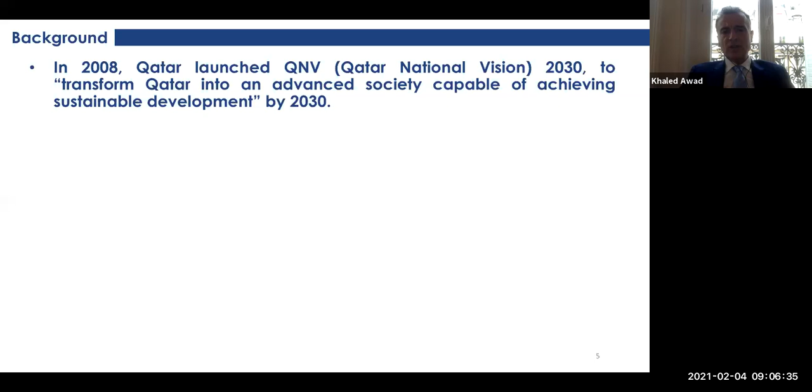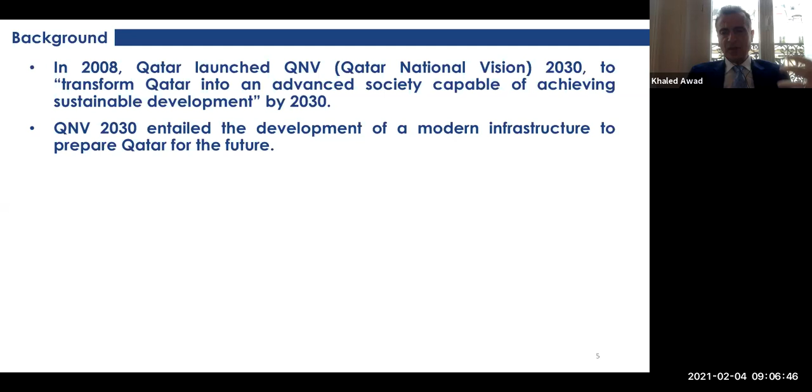So just some background. In 2008, Qatar launched Qatar National Vision 2030. The aim was to transform Qatar into an advanced society capable of achieving sustainable development by 2030. The whole idea was to make Qatar something modern, and to do that they had 4 pillars: human development, social development, economic development, and environmental development.

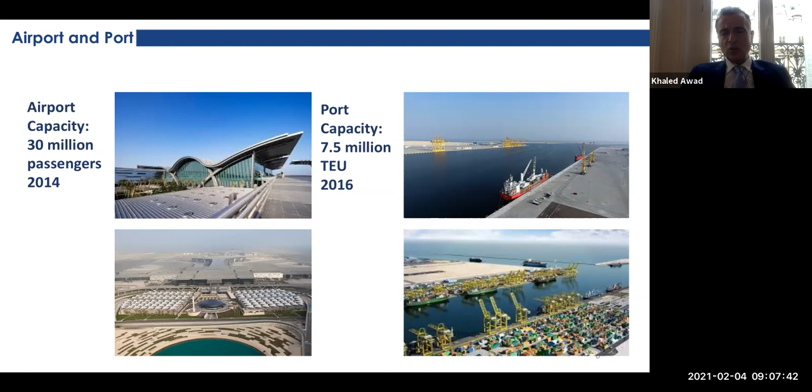One important part of the discussion today is how the infrastructure component came into the vision. For example, they had an airport that barely had 5 million passengers in 2008. In 2014, they completed the first phase, and the airport now can accommodate 30 million passengers. They had a port capacity of less than 1 million 20-foot container equivalent units, the TEU, and in 2016 their port was expanded to 7.5 million TEU. Now they plan to make the airport 50 million passengers by 2030, and the port 12 million TEU by 2030. So we'll be talking today about the stadiums, but there are so many other developments that went through in Qatar.

The Lusail city is a completely new city north of the capital of Qatar, which is Doha, around 25 kilometers from Doha. It was supposed to accommodate 450,000 people in the next 10 years.

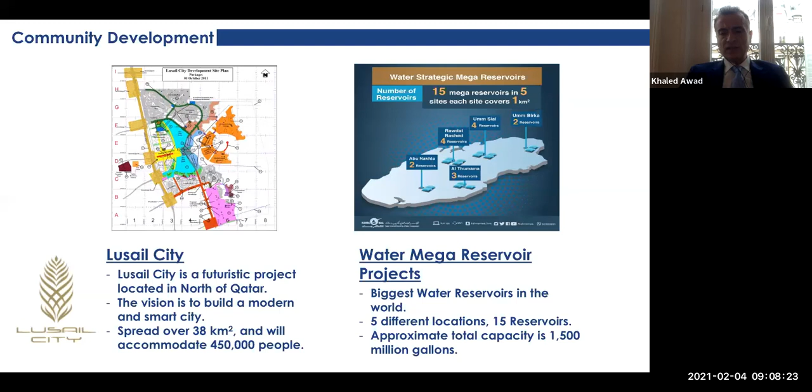Another project was a mega reservoir project with 5 different locations and 15 reservoirs. Qatar doesn't have water, so they desalinate all of it. On top of that, they wanted to make sure they have water security facilities, which is why they developed the water mega reservoir projects, which I'll talk about later in the presentation.

Another component was the metro, consisting of 3 lines—the gold, green, and red lines—with 40 stations and 2 major stations in the whole country, spanning around 76 kilometers of metro lines. Another transportation project is the tram lines, the Lusail light rail transit line, with 37 stations and around 33.1 kilometers of lines.

Part of the infrastructure is, of course, the road network. They had the Sabah Al Ahmad corridor, which links the airport with the expressway. The expressway is a huge transportation road infrastructure in Qatar, one of the biggest infrastructure projects related to road construction in the world. One of its components is the Sabah Al Ahmad corridor, which consists of 37 kilometers of roadworks.

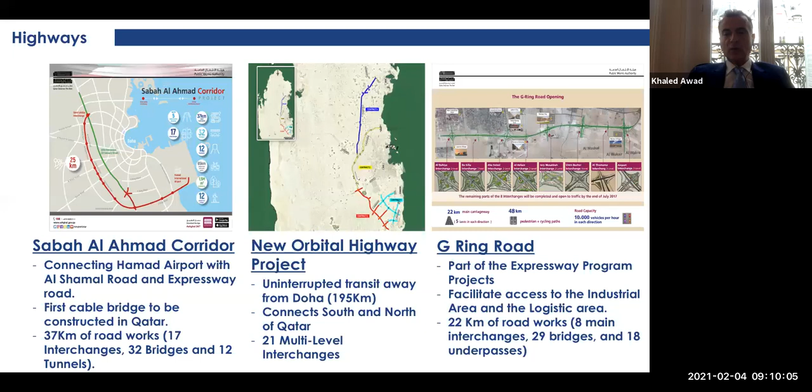The G Ring Road, a ring road, is also part of the expressway program, and it gives access to the industrial area and the logistics area. It has 22 kilometers of roadwork. All these infrastructure projects were undertaken in Qatar as part of the Qatar National Vision 2030, which was established in 2008.

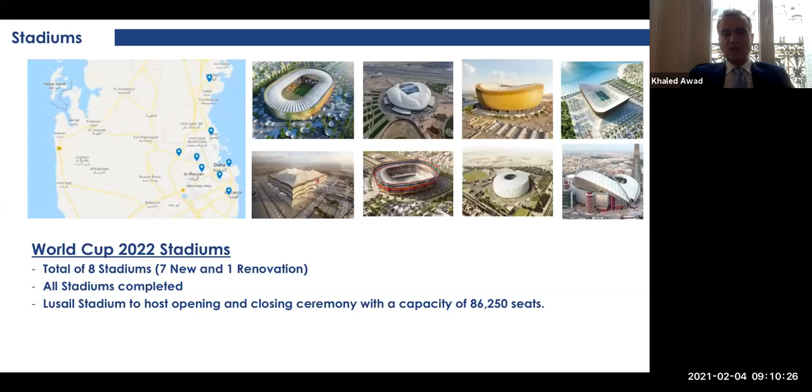Let's talk about the stadiums now. We'll be talking about 8 stadiums—7 totally new stadiums and 1 renovated, existing one. Initially, when Qatar won the bid to organize the Qatar 2022 FIFA World Cup, they bid for building 12 stadiums.

But then, when they found out the cost and time this would take, in 2014 they decided to reduce it to 8 stadiums, and FIFA accepted, based on the fact that the same infrastructure—accommodation and logistics—would be there to take care of all FIFA's requirements. So there was no change in the total investment Qatar would make; just the number of stadiums was reduced to 8.

The main reason Qatar won the bid in 2010 was that it promised to make these stadiums very sustainable with a very low carbon footprint, and most importantly, to give 170,000 seats from the stadiums, once the World Cup is over, to other countries in Africa. They even committed to demounting one entire stadium—one of the 8 will be completely demounted and taken to another country. I'll show which stadium that is when I talk about it.

So the total investment for the stadiums is around $10 billion, which includes the 8 stadiums and the adjacent infrastructure.

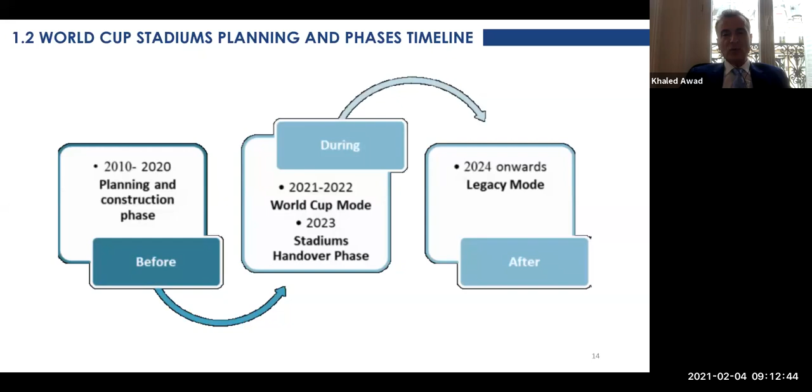Part of their bid was to show that there is a legacy mode, that these stadiums will not be deserted with nobody in them, because Qatar is a small country and there will be no way to fill these stadiums after the World Cup. So they had to show what the legacy mode would be after the stadiums are done.

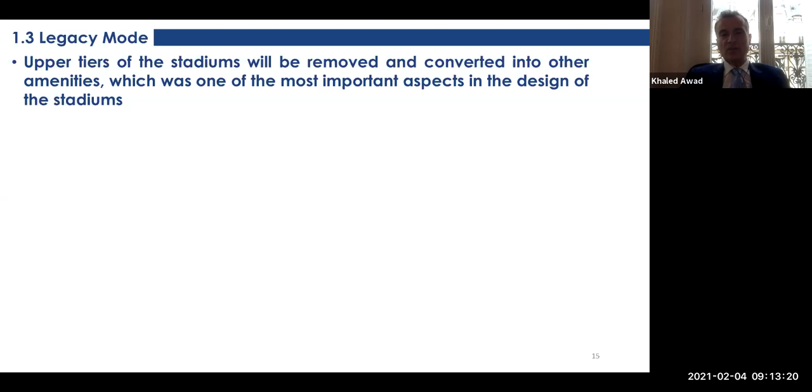Qatar said in their bid that in addition to gifting 170,000 seats, all the upper tiers of the stadiums will be built in a way that they could be removed and converted into other amenities. So once the World Cup is finished, you will see different uses of the facility at the top of the stadium - shops, malls, and cycling areas inside these stadiums. That was a very powerful bid component to FIFA.

That donation of seats, the sustainability component, and the fact that they will be renovating the top parts of the stadiums with new amenities helped Qatar win the bid. It also showed that even with reduced capacity - when they donate the seats and give out one of the stadiums - the remaining part will have such a nice atmosphere as has never been done before.

So you come to the stadium not just to watch a football game, but to do other things inside it as well. This is something totally new - a stadium becomes a visiting place whether there is a football game or not.

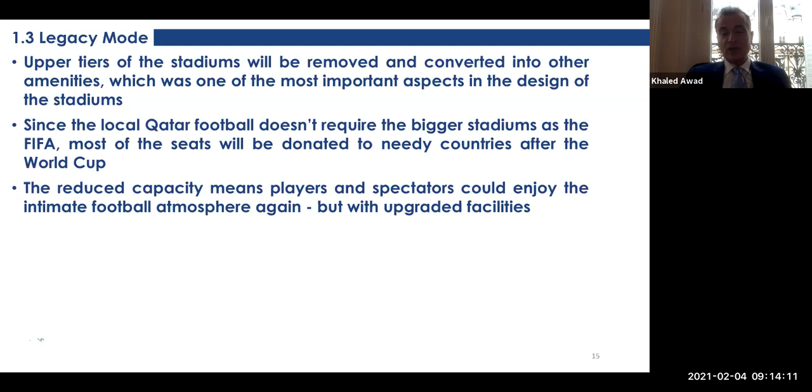Total of 8 stadiums, as I mentioned. In Al Khor, there is one - Al Khor is on the top north part of the country. In Lusail, the new city being built, there is one. And in Doha, the capital, there are 4. Plus 2 remote stadiums.

One remote stadium is Al Bayt, and the other is Al Wakra. Between Al Wakra in the south and Al Bayt there is 145 kilometers. This is the first time all the stadiums are within 150 kilometers of each other altogether, which imposes a huge infrastructure and logistics challenge, because people have to commute between places - hotels, transportation. That's why the infrastructure component of the World Cup is even more important than the stadiums themselves.

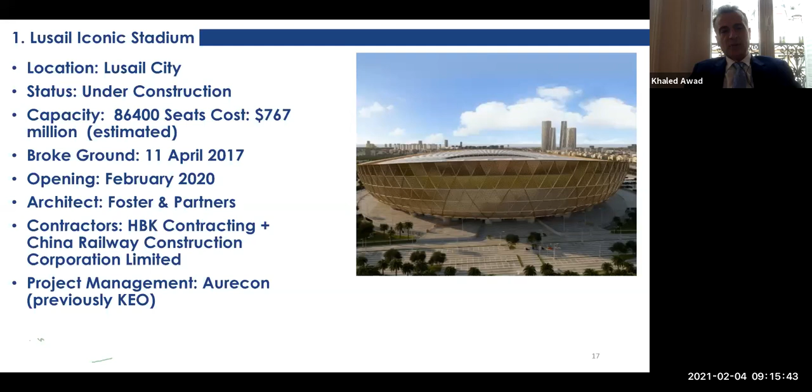The most iconic stadium is the Lusail Iconic Stadium. Lusail is the new city they are building, and this stadium will host the opening and the final game. It has a capacity of 86,400 seats - a huge stadium that cost $767 million. Construction started in 2017, and it opened 8 months ago. There's still some minor work going on, but the project is overall finished.

It will host the initial and final game, and is inspired by the old Arabic lanterns used to move ships or to move between in the desert. The top part will be transformed into a community space with schools, shops, cafes, and sporting facilities inside the stadium, as part of their design. Hopefully that stadium will become not just a sports arena, but also a destination for entertainment and for going out in Qatar.

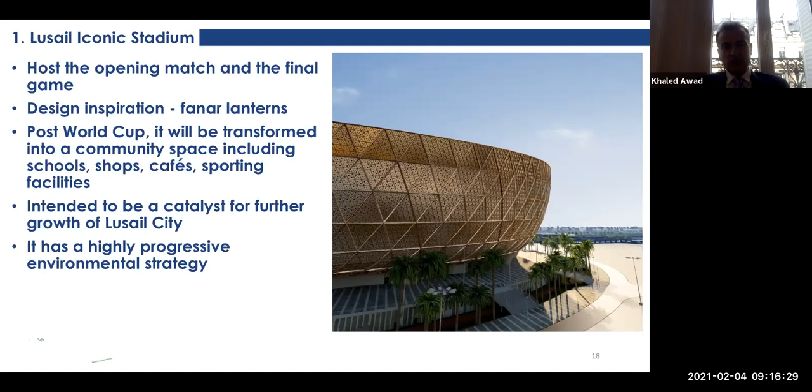One of the most important aspects of all these stadiums is that they calculated the total carbon footprint of construction and made sure it would be zero. I'll show you how they did that at the end.

This is a completed stadium. It used ACI 318, the building code, for its concrete design. The service life of the stadium is 60 years, and a lot of modeling was done to make sure this is actually achieved. They used 45 to 60 MPa concrete in different sections, totaling more than 150,000 cubic meters.

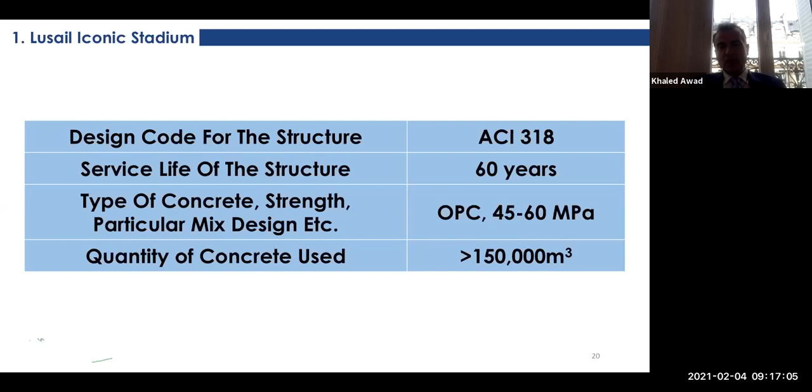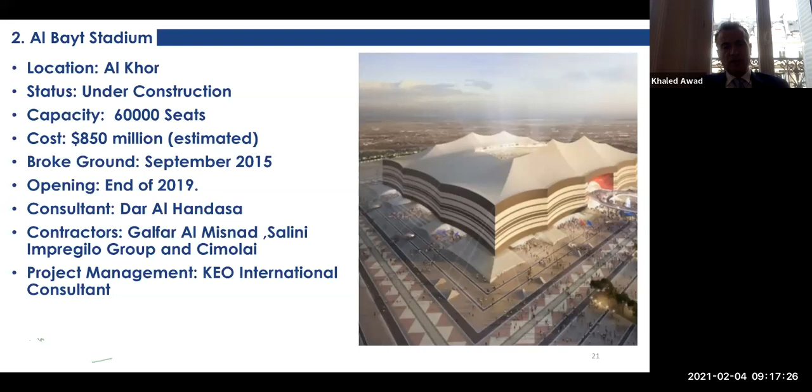The second one is Al Bayt Stadium, in Al Khor, in the north part of Qatar. It is still under construction, 60,000 seats, $850 million. It started in 2015 and should have opened at the end of 2019, but I think it will open in the next 2 months. This is one of the important stadiums in terms of sustainability, because it scored 3 out of 4 in the global sustainability assessment system.

What Qatar did is the GSAS, the global sustainability assessment system, a general sustainability rating system like LEED and other rating systems, approved by FIFA to be used for all the stadiums. Qatar showed that each stadium will score very high on this sustainability system.

The design of the stadium is like a Bedouin tent, so it's like a tent in the desert, with a canvas-like facade.

After the World Cup is over, the upper tier will be removed, and the stadium will have just 32,000 seats. So out of the initial 60,000 seats, 28,000 will be donated and used by the local Al Khor club. There will also be a 5-star hotel with all the facilities inside the stadium.

The Al Bayt Stadium was quite challenging in terms of the facade, because of the design nature, the tent design nature. More than 2,500 modular seats at the north stand were put in. The facade membrane was PTFE, around 300,000 cubic meters of concrete including the infrastructure around it, and around 39,000 tons of steel.

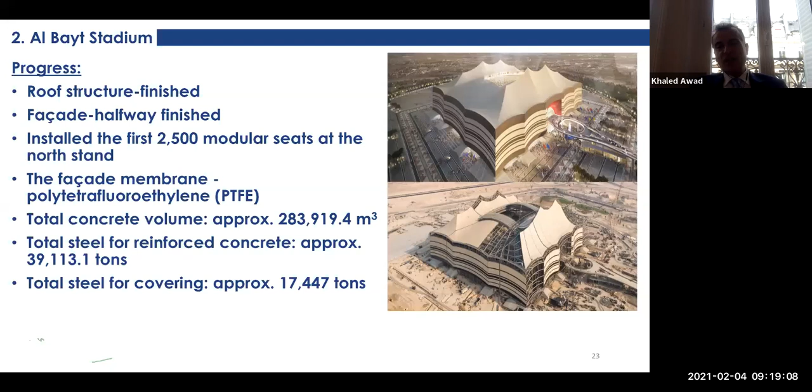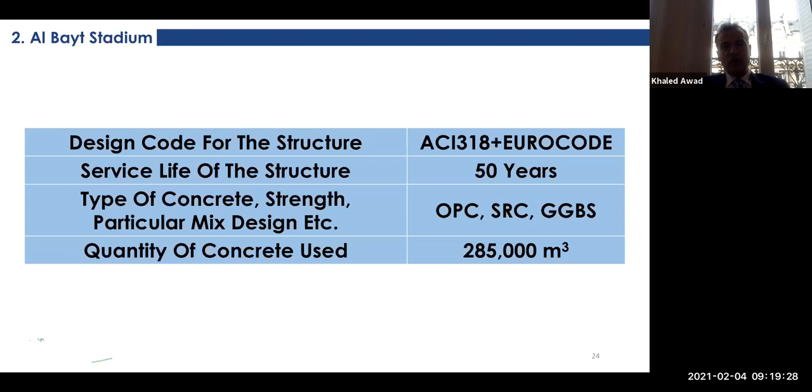The steel covering for the stadium is 17,400 tons. ACI 318 was used, but also some Eurocode for specific requirements of steel, and the service life is 50 years. They used different types of cement in different sections of the concrete of the project, 285,000 cubic meters.

Al Janoub Stadium is the south stadium, the furthest stadium south in the Al Wakra area. It is completed, 40,000 seats, $775 million. You see the difference between the cost is always related to the architectural design more than the actual number of seats. It started in 2014.

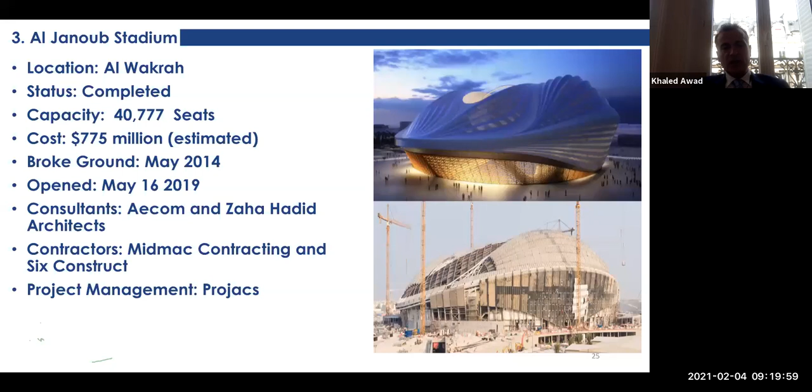It was opened 2 years ago, and Zaha Hadid was the famous architect for that project. Again, it had a Class A rating by the Global Sustainability Assessment Standard, and it has all the shading and the aerodynamics for the mechanical ventilation system to reduce the impact of the heat.

Initially, Qatar was supposed to have all these stadiums functional in the middle of the summer. But then the cost of having air conditioning and other things came in, and they tried to reduce it by increasing shadow. But when FIFA inspected Qatar in summer in 2011, 2012, they said there is no way we can do this World Cup in summer.

Even if you do all the shading, it will be very difficult for people, not just in the stadium, but outside the stadium, to move in and out and stay in the streets. So FIFA gave an exception to Qatar to hold the World Cup in the November-December period of 2022. This is the first time the World Cup will happen in the winter.

This was a very exceptional situation, and FIFA said even if you do the stadiums in a very shaded way, with all the ventilation system, even with air conditioning, this will not be good for the spectators and the audience, because they have to go out and in. It's very difficult to live in Qatar in summer, because you have more than 45 degrees temperature all summer in the city.

Now, this top tier of this stadium will be transformed into schooling, a wedding hall, cycling tracks, restaurants. So a new way of looking at it, not just as a stadium.

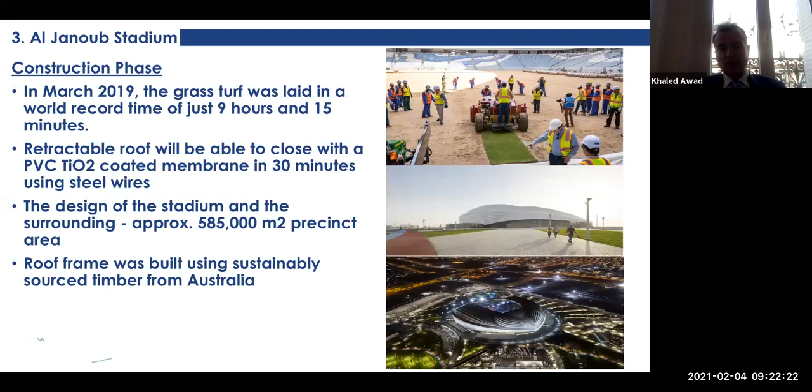The whole area was developed around the stadium, not just the stadium itself. Even the roof was built using sustainably sourced timber from Australia. The whole area is now complete, and I visited 6 to 9 months ago, before COVID, and it was totally done.

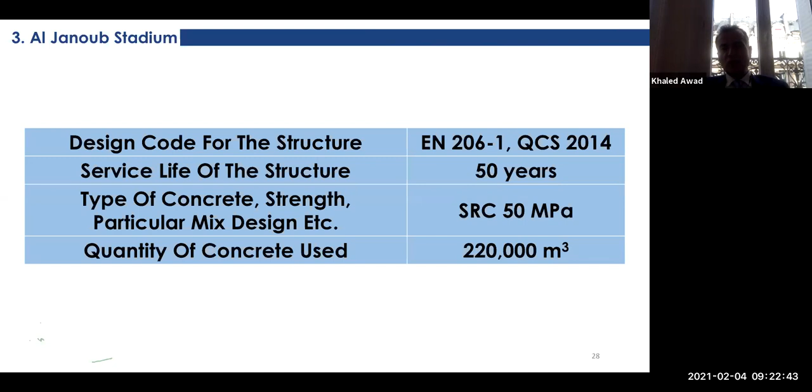They used European standards for this project, with a service life of 50 years. They use sulfate-resistant cement, which is not usual in Qatar for many reasons, and 220,000 cubic meters were used.

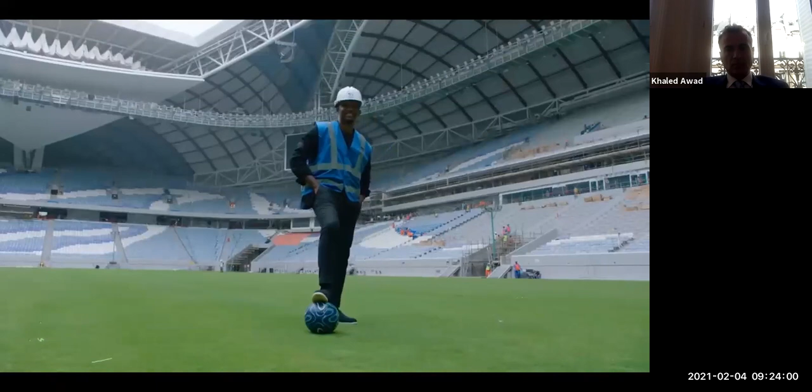The other stadium is the Education City Stadium, located in Education City, a new city being developed in Doha. It is still under construction with 45,000 seats. It should have been opened in 2020 but will now open before June 2021.

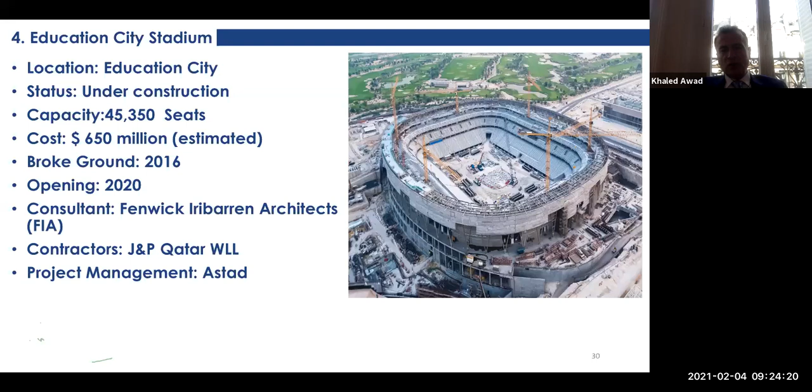COVID has disrupted so many activities. It will host matches up to the quarterfinals. They increased the seating capacity to 45,000 as part of the reduction in the number of stadiums—this was one of the stadiums where they had to increase the seats.

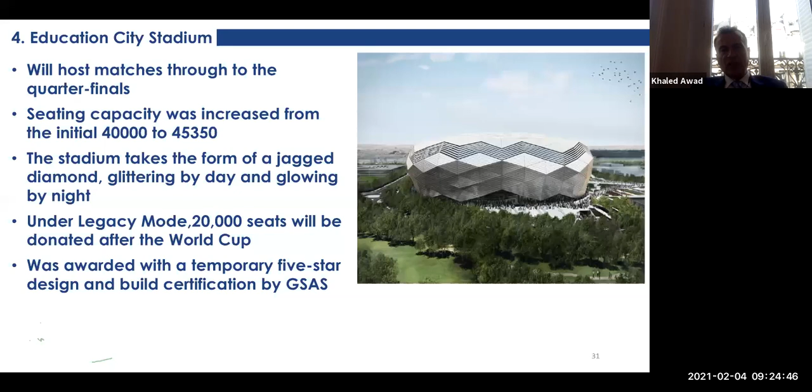Under the legacy mode, once the World Cup is completed, 20,000 seats will be donated to poor countries. It also received a 5-star rating on the GSAS sustainability standard.

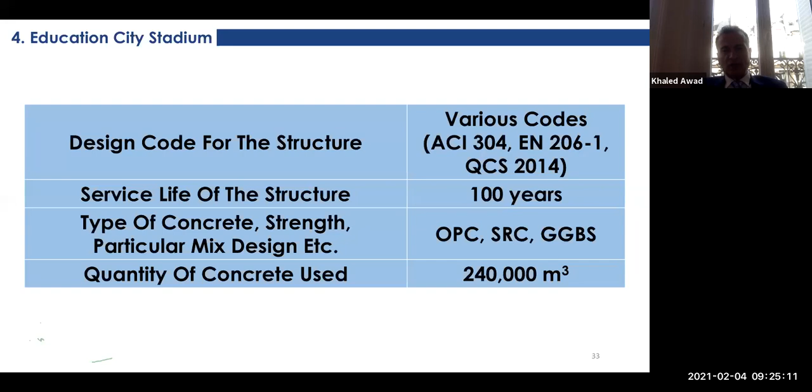240,000 cubic meters of concrete, and all the concrete is now in place. The structure is finished—it was quite a complex construction, as you can see from the architectural design. They used ACI and European codes, as well as the Qatar construction standards of 2014. The service life for this stadium was 100 years, with 240,000 cubic meters of concrete.

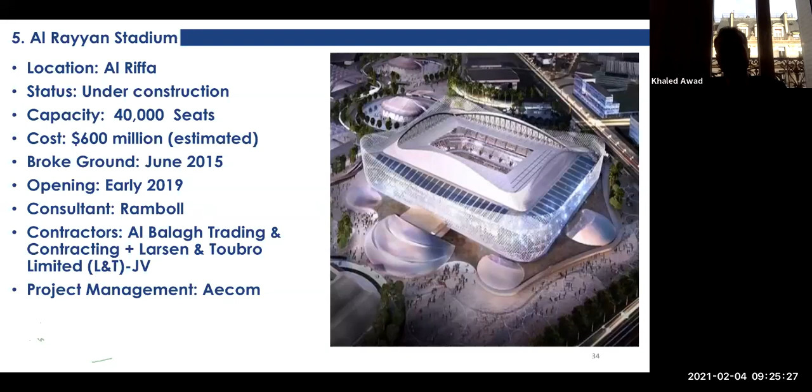Al Rayyan Stadium is a 40,000-seat stadium costing $600 million. Started in 2015, it was opened in early 2019, and it will host matches up to the quarterfinals. Again, it received a 4-star rating on the GSAS.

It was actually replacing an existing stadium—the old stadium was taken out and the new one came in its place. It looks like another large tent in the desert.

From a sustainability point of view, they used demolished material from the old stadium as much as possible in the new one. The facade of the stadium will have a huge media show on it, so it can become an outdoor event space for projections, cinemas, and other things.

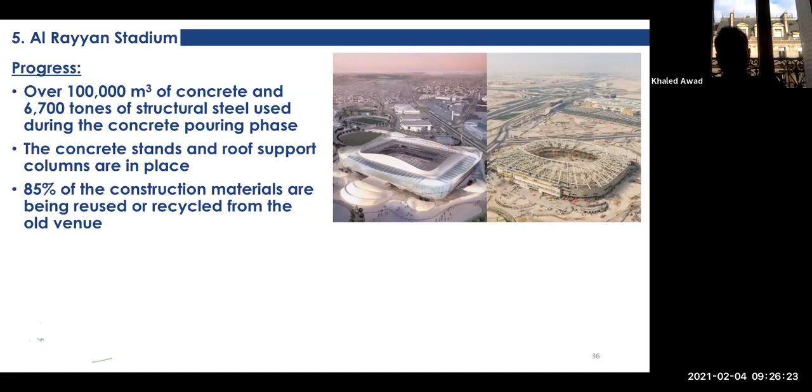Half of the stadium's seats will be removed and donated after the World Cup. There's more than 100,000 cubic meters of concrete and 6,700 tons of steel in this project. Most of the structure was finished last year, using ACI 318 and Qatar construction standards, with a service life of 60 years and 100,000 cubic meters of concrete.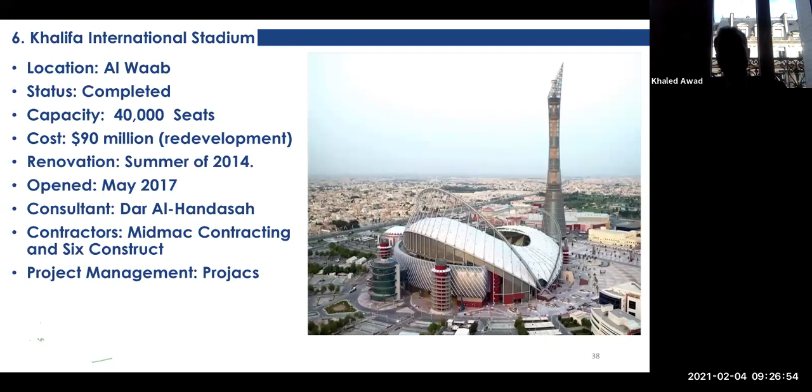The Khalifa International Stadium was the only stadium that was renovated, so there was no new construction except for the renovation. It was the first project to be finished, and it was highly rated on the sustainability standard—12,000 seats will be donated as part of the legacy project.

This project involved a huge lifting operation because of the steel tension cables and the large panels—92 panels weighing a total of 4,000 tons, around 40 to 45 tons per panel.

They had to bring a special crane for that; the crane itself weighed 600 tons. Even the operator had to be specially brought in to make sure the crane could lift these panels safely. The panels were 47 tons and the crane itself was 600 tons, but operating the crane was very sensitive, so they brought in a special operator who had done a similar project before.

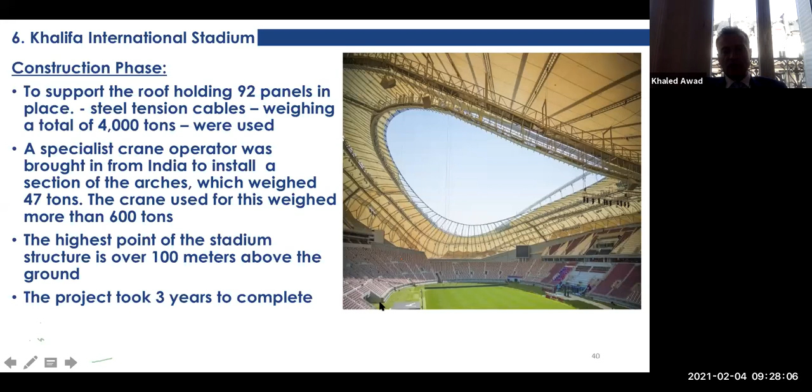The total height is 100 meters above ground, and it took 3 years to renovate the whole project. They used European standards, with a 50-year service life and 170,000 cubic meters of concrete.

Ras Abou Abboud Stadium is a very unique stadium—it will be completely demounted and sent to another country. Qatar announced a few months back that they will send the whole stadium to an African country, I think it's Morocco, and the whole stadium will be taken out.

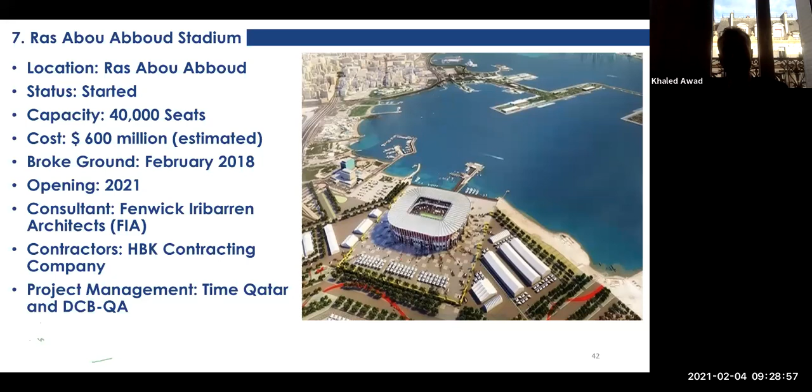This stadium is actually made out of ship containers—a total steel structure made only of steel containers. It's the first time they've built a stadium out of shipping containers. It has 40,000 seats, an estimated cost of $600 million, started 2 years ago, and will hopefully be finished before the end of the year.

It's all modular, using recycled containers, and it will be completely dismantled and sent by ship to Morocco.

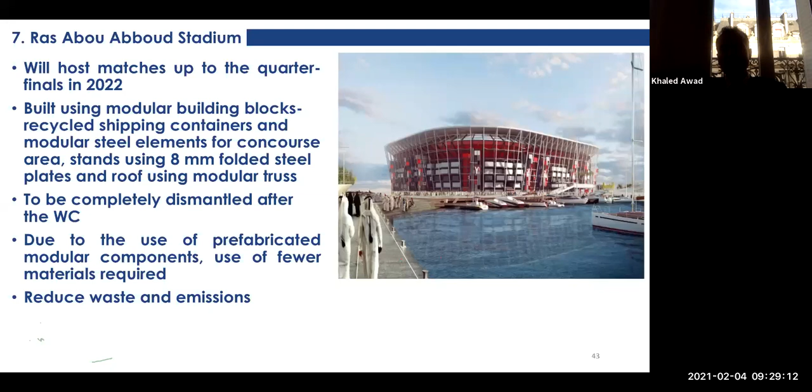Now, this is in the final stages of the project. It's actually going to consume more than 1,000 containers and 27,000 tons of steel for the construction of the stadium. They used Eurocode for that project as well, 50 years service life, and 40 MPa concrete for the foundation. 30,000 cubic meters of concrete only, because most of the structure is steel.

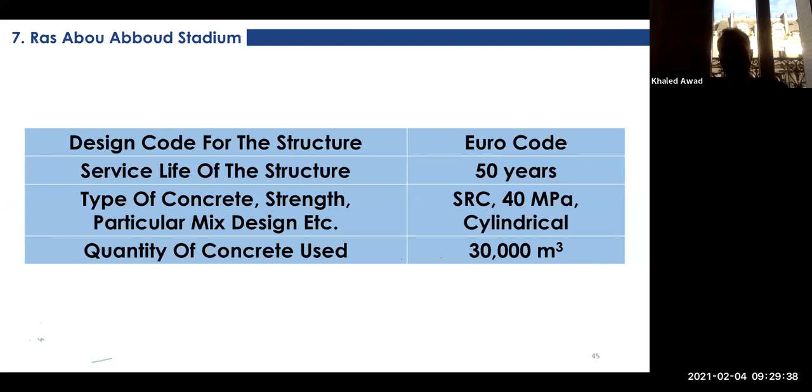Finally, the Thumama Stadium has 40,000 seats, approximately $350 million in cost. It started in 2016 and will open in 2020.

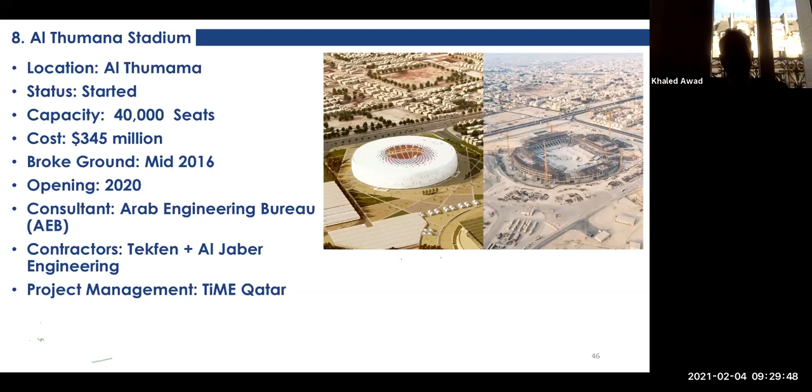The project is very locally inspired by local design, and this is one of the stadiums that was actually fully designed during the bid. The design was very ready during the bid, and it helped Qatar win the World Cup bid in 2010. So the number of seats will be reduced to 20,000, and the rest of the seats will be donated as part of their bid commitment.

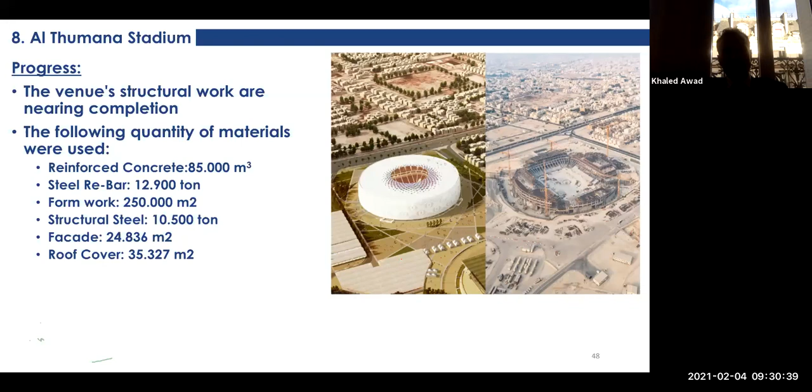This project is practically finished. Around 85,000 cubic meters of concrete, 12.9 thousand tons of steel, a huge area for formwork because of the design, and the facade is 24,000 square meters. They used ACI 318 and Eurocode with a 50-year service life and 50 MPa concrete.

Now, this is as far as the stadiums are concerned. But as I said, because of their adjacency and being located close to each other, the infrastructure requirements for the stadiums were even bigger than the stadiums themselves. So let's talk about what happened with the infrastructure in Qatar.

Just to give you an idea of the scale of what was going on, in 2017 the finance minister of Qatar said that Qatar was investing $500 million in infrastructure construction every week. So this was the rate at which infrastructure was being constructed and developed.

According to different studies, including MEED, the Middle East Economic Digest, which gives spending in each country, Qatar spent around 200 billion on infrastructure: 20 billion on roads, 40 billion on trains and metro, 25 billion on the airport and new port, 5 billion on hospitality and hotels, and 30 billion on construction projects.

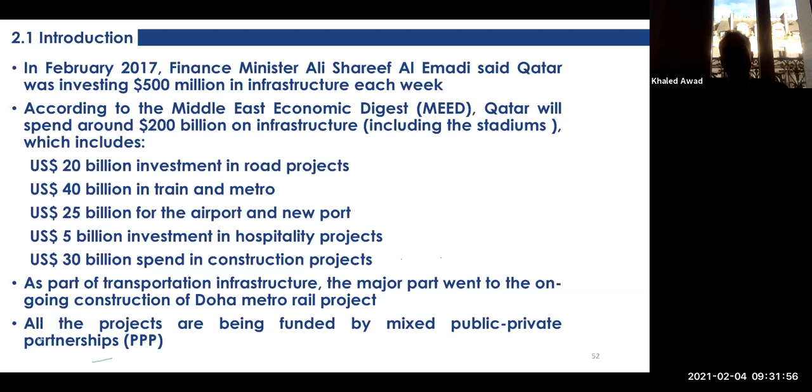A lot of these projects were done in public-private partnerships, but still Qatar's commitment for the World Cup 2022 is actually the biggest ever made by any country.

Let's talk about some of these projects. One is IDRIS, the Inner Doha Resewerage Implementation Strategy. One of the things you have to plan for with infrastructure is the sewage system, so there is a whole overhaul of the sewage system in the city to accommodate a huge number of people in a very small, congested area. It's a $3 billion project with around 45 kilometers of sewer network, and it will be completed in the next few months.

The other huge program is the Expressway program. This is, I think, the biggest ever infrastructure project for roads in the world. It's a key component of Qatar's whole transportation strategy, with a $14 billion budget — I think they've exceeded the budget by at least 20% so far, as of the latest I heard. It has 51 separate projects. When you have a big project, to be able to execute it, you cut it into smaller projects so you can do it more easily, and so 51 projects came out as components of this big program.

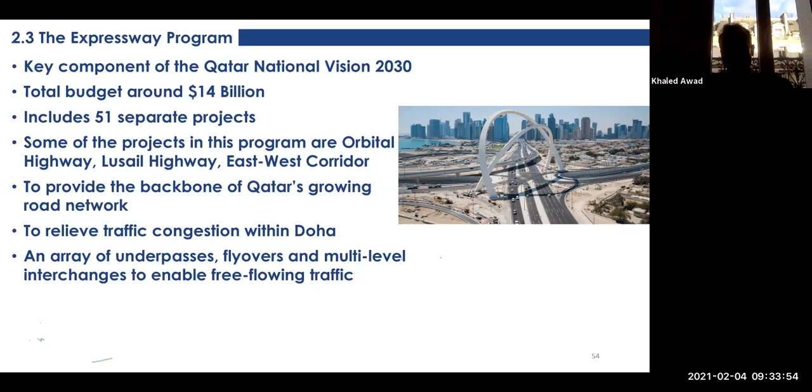Some of the projects in this big program are the Orbital Highway, Lusail Highway, and the East-West Corridor. This is going to be the backbone of the whole Qatar 2030 vision. The main point is to relieve traffic, even during the World Cup, even with the metros — if you don't have roads and networks like this to transport people, it will be difficult to accommodate 3 million people, since Qatar has a population of 3 million. They are expecting at least 3 million visitors, assuming COVID and the pandemic are over, hopefully. There's also a huge array of underpasses, flyovers, and multi-level interchanges to enable free-flowing traffic.

As part of this expressway, there's the new Orbital Highway. It's quite unique because it enables 8,000 light vehicles per hour and 1,500 trucks per hour — they have different lanes for trucks and cars so it can accommodate a huge number of vehicles at the same time. It's done in a very sustainable way, and it will surround Doha, the capital of Qatar, from 3 sides.

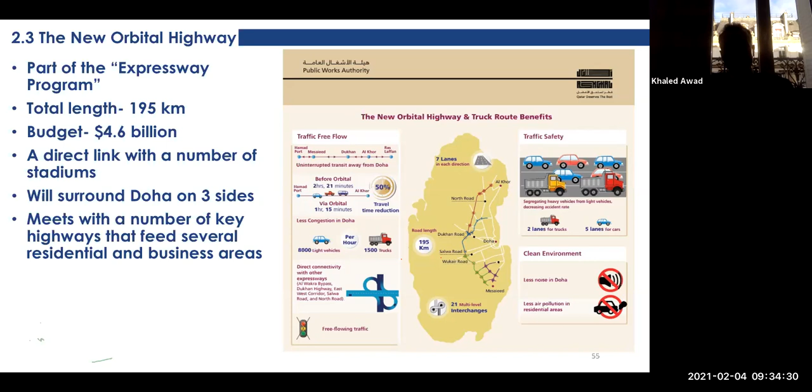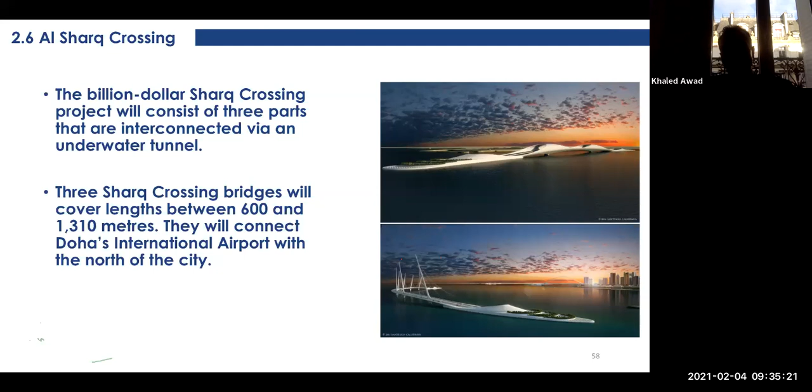Al Sharq Crossing is the new project which will be starting soon, but they are still waiting to see if they want to start it before the World Cup. I don't think this will serve the World Cup. It is one of the biggest bridges ever done in the world, and this new infrastructure project will connect the Doha airport with the north of the city.

The nice part of it is that it's a big bridge. You can actually cross it with a car, but they are also going to have a funicular that will take people throughout the bridge, with glass around it so you can see Doha from both sides while inside. So you can be transported through a funicular in addition to using cars and trains.

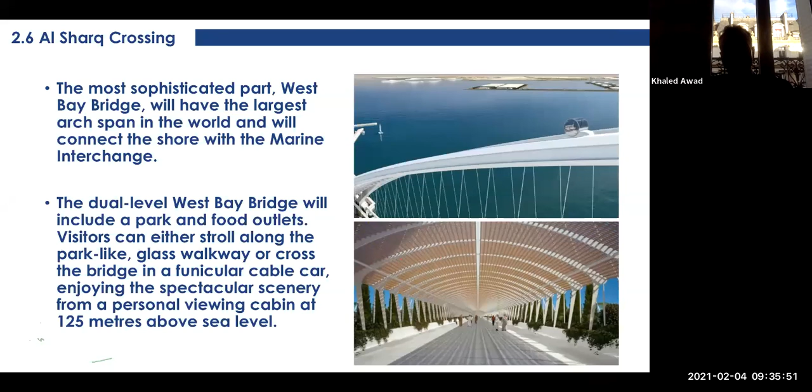Other notable projects are being undertaken. As I said, Qatar tried to be carbon neutral, and to do that they developed an 800 megawatt solar photovoltaic plant that will offset all the carbon emissions from the construction. They calculated that even with this plant, the whole World Cup 2022 project, including infrastructure, will be carbon neutral.

Another big project being undertaken now, very similar to the Palm in Dubai, is Qetaifan Island. It's going to be a man-made island in the south, with two parts, the south and the north of it.

The final one is the Qatar National Museum project, which is going to be kind of an experimental project, because there are so many things that will come and go, like different world museums coming and using this museum for a year or two. So it's going to be a very fancy way of showing antiques, pictures, and other things by using museums from all over the world. You can see from the design that it is quite fancy and sophisticated.

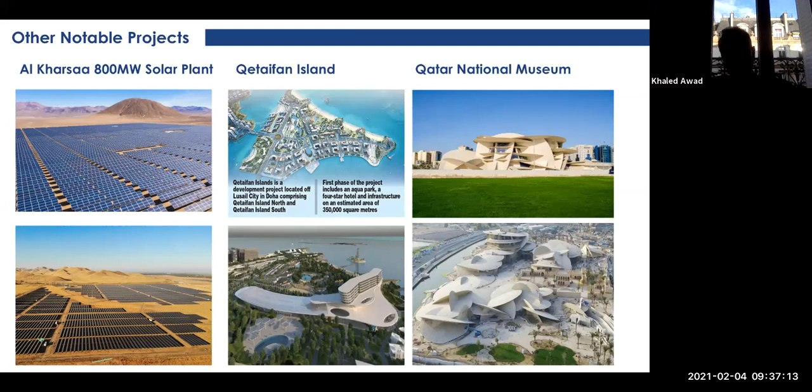So these projects have been planned and designed. The solar plant is actually finished, and the other projects are going to start very soon.

Now, these projects did not happen without problems. All of them had issues and challenges. The main challenge when you are in the Gulf, especially in places like Qatar, is airborne salts because of the ocean, hot weather concrete, and high humidity — all these constraints make construction very difficult.

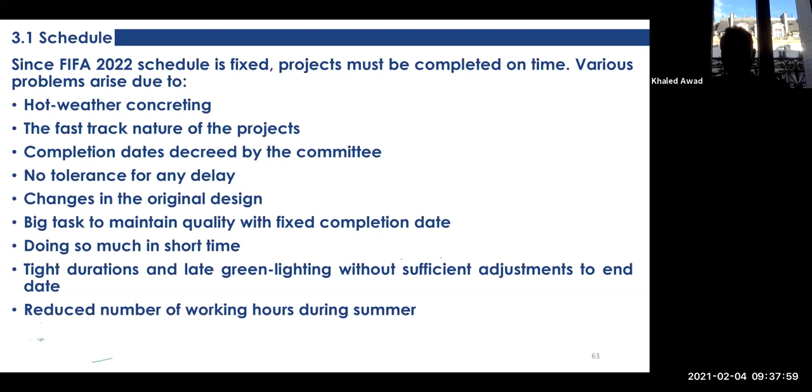With the fast track project and no tolerance for delays, there was no possibility for changing the original design, but they actually had to change it because they reduced the number of stadiums. This put a lot of pressure on construction and on the number of working hours for everybody. For example, 7 of the 8 stadiums will be within a 55-kilometer radius.

As a comparison, Germany had 400 kilometers between stadiums, South Africa 700 kilometers, Brazil 1400 kilometers, whereas Doha is 55 kilometers. Although it's a big advantage to be close between stadiums, it's very difficult to move people and serve them within such a congested area. Just one city like Al Rayyan will have around 3 stadiums that are 15 to 40 minutes apart.

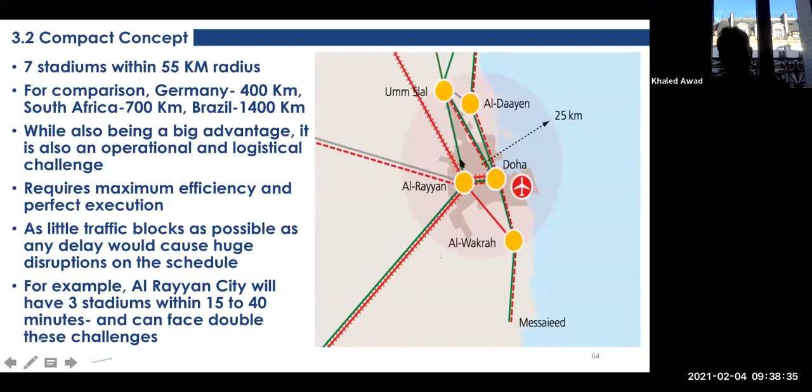One of the other challenges is the projects happening at the same time as the World Cup. One of them is the Qatar National Library, a very fancy design done by Zaha Hadid again. The slab had to be poured upside down because of the shape of the building — 2 square plates, 138 meters wide each, pulled apart and folded diagonally. So the concrete quantity was not very big, but it was quite challenging to pour.

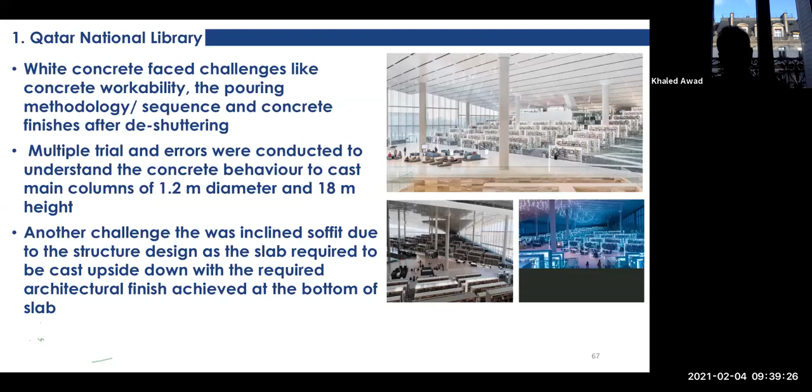This is the view of the library from the inside. We were part of this project in the quality control area. There were so many trials and mock-ups for thermal mass management and thermal mass modeling, making sure the concrete would be fair-faced. All of this had to be tried beforehand, and the way to pour the slab was another challenge.

Another challenge is the water facilities. I talked about the water reservoirs earlier — Qatar was trying to build pre-stressed concrete tank reservoirs quickly so they could have 620,000 cubic meters of water and around 2.5 gigawatts of electricity, about 25% of the daily demand of Qatar. This is all going to be stored and available in the reservoirs.

The total volume of concrete in 4 tanks out of the 15 that were going to be built is 50,000 cubic meters, plus 2,000 cubic meters of shotcrete. The design life for these reservoirs is 100 years, and we're using AWWA standards with pre-stressed standards on the project.

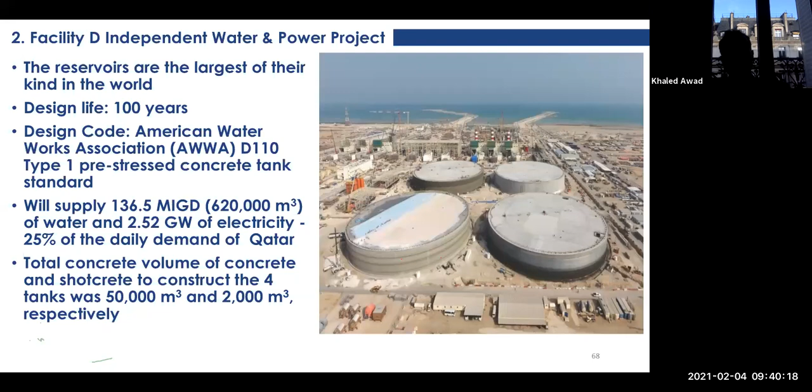Each reservoir had a 35 million gallon capacity, so around 159,000 cubic meters of water will be stored in it. It has 208 columns supporting a huge flat roof with circumferential pre-stressing of more than 1,000 tons at 2,000 kilometers of galvanized strand. Everything was applied with an automatic robot for the mechanical force, and I can show you.

So that gives you an idea about the construction of the water tanks.

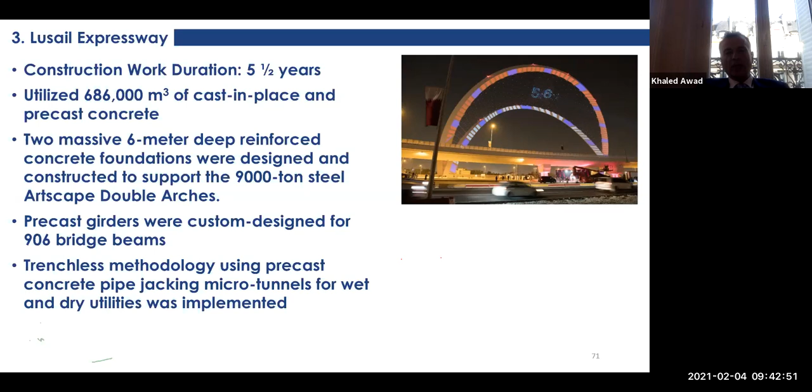And more than 906 bridge beams, custom designed. They used trenchless methodology, so all concrete precast pipe jacking, microtunnels for wet and dry utilities have been used.

And there was 6 vehicle tunnels and 1 rail tunnel, and deep concrete boxes. They are all below the water table with 2 to 3 meter thick base slabs, just to make sure there is proper management for buoyancy and pressure. That's why the concrete was very special and very durable, because again it is a very long service life project.

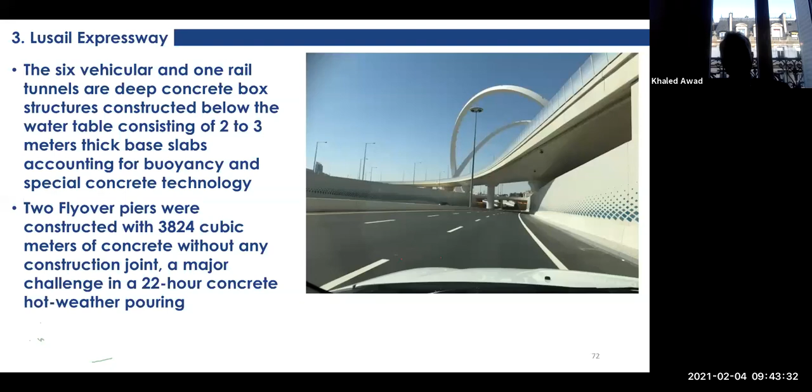And 2 flyover piers constructed with 3,824 cubic meters of concrete without any joint, which was quite a challenge. That's why they poured it in a 22-hour hot weather concrete environment. I'll show you again a time lapse of this project.

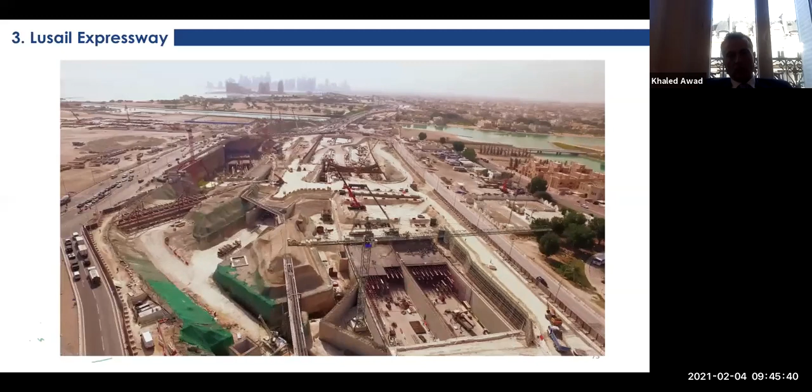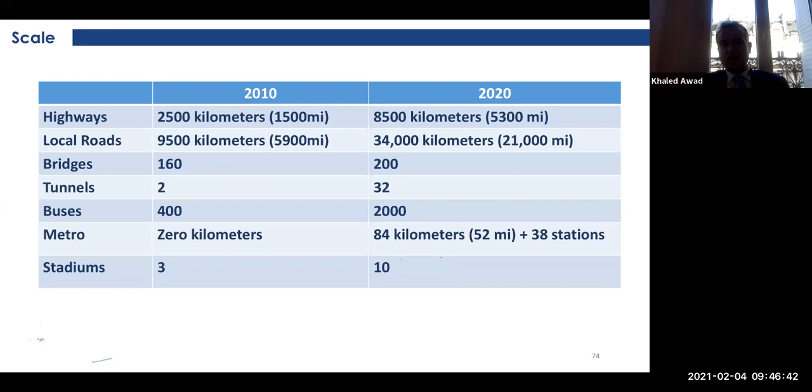Hopefully we can see you all in Qatar in 1.5 years from now, in November 2022. Hopefully everything will be done and finished, or even less than 1.5 years from now. So thank you very much for your attention, and I'm happy to take any of your questions.

Thank you so much, Mr. Khaled, for your presentation. It's really an honor for us to get this kind of presentation, especially coming from someone with the experience and knowledge you have. It's amazing how you are working on having everything under control, all the details needed to organize these kinds of events like the World Cup. It's a really, really interesting presentation.

We have some questions that I'll read to you. From Mariana Carrillo: was it difficult to find construction materials to build those stadiums?

Yeah, most of the materials, the main important materials, were imported. So it was quite a logistical nightmare to import timber, let's say, from Australia, steel from Ukraine, from Turkey, from different countries around the world. So there was a kind of logistical issue, and one of the reasons they had to increase the port capacity was to be able to import such materials for the World Cup stadiums. So yes, it was a challenge, but because everything was imported, there is very little being constructed locally.